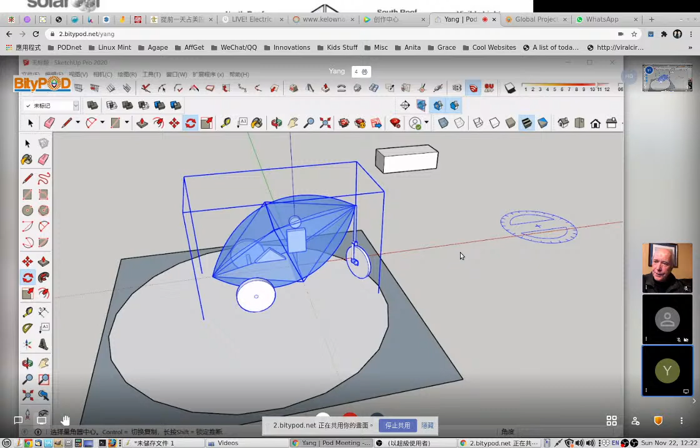Oh no, it shows that your microphone is muted. Oh, the setting - maybe I need to change it. I set it so that everyone joining is muted. Oh no, I disabled it. No, it's okay, I didn't. It shows your microphone is not muted, but we cannot hear you. Maybe let me kick this one out. Let me stop sharing my screen. Still nothing - I wonder whether it has something to do with this third person. Who is this guy? Is it you or someone else? I don't want to kick someone out. We have a fourth person now. Oh yeah, we got you now, that's good, we hear you. Now I think it might be that I have a Bluetooth keyboard, and I have to be careful about the Bluetooth connection - it takes two or three hits on the keyboard to lock in the connection. So I have to be sure my keyboard is activated, otherwise I try to allow but it's not accepting it. I'm not quite sure what's going on, maybe it's possible.

I wanted to ask you earlier, have you watched that video showing a group of kids riding on four-wheel wooden cars they made themselves? The one that Corin made, it's a long video. Yeah, I watched it - kind of crazy, very dangerous, but very fun, very experimental. Apparently they use braking to make it turn, because there's no steering wheel. Braking can be used for turning - looks like they use a similar mechanism. Yeah, this has been known for a long time, as you say, tractors, tanks, all kinds of mobility. And tanks are very mobile - they can move and go all terrain. So steering by braking is well known, it's not experimental.

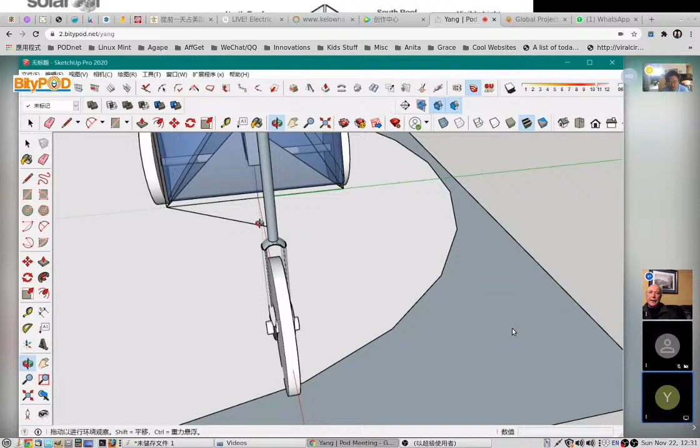What this triangulation is doing - because otherwise that's a long piece standing all by itself. So what if it hit a hard bump? It might break, it could be like a big arm torn away if it hits something hard. So this will help control the arm.

Let's look at the side view of that. Bring the whole thing. Now you see the vertical - the way that the tubing supporting the rear wheel is, I think it's completely vertical, the back wheel tubing, exactly vertical.

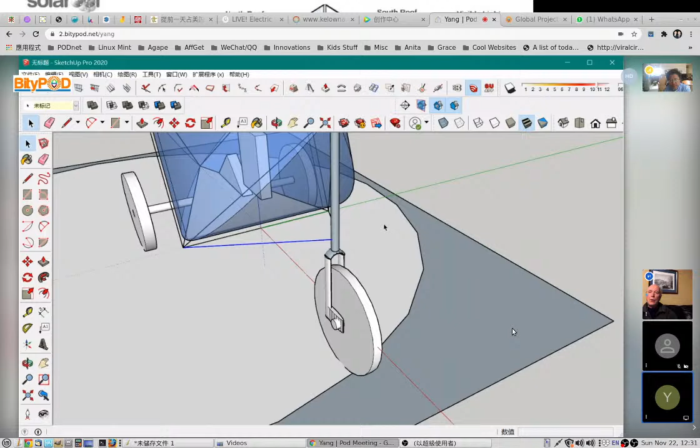What we could do is put it on a little bit of an angle, spread it out, push it to the rear, so the contact point of the wheel to the ground is further away. It's like rotating, pivoting the whole thing around a point up at the top. Turn it, push it out a little bit. What it's going to need is that we extend it as well, so it's still touching the ground.

Or what could happen is we lean the car backwards a little bit if we do that - so one or the other. If we want to keep the same angle, then we'll let that pipe be extended, stretch the pipe itself to compensate so we reach the ground. If we set the wheel on the ground, we just extend to make the connection, and won't worry about the connection up there and down below. Now those triangulated swing arms need to extend, and what happens is this is where it gets a little bit complicated.

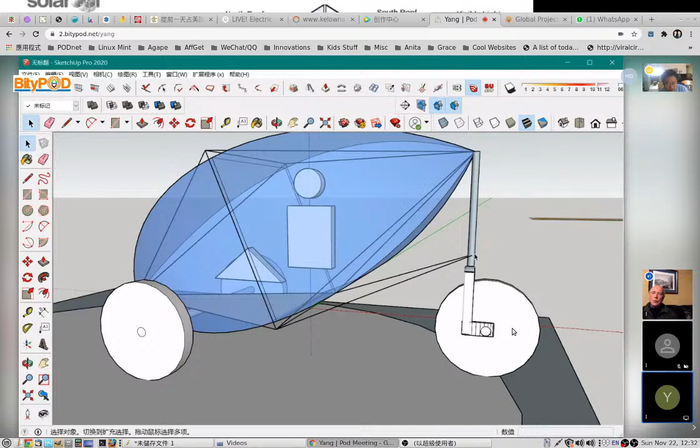Hi, who's there? Is that Anthony, the general contractor, the builder? Hi, Anthony. Today we're building a vehicle, Anthony. We cannot hear you, Anthony, so maybe your microphone is not working. I don't know, it's muted maybe.

Anyway, this is just like a bicycle, very much like a bicycle. So now you see the unsprung weight is the wheel that moves up and down when it hits a bump.

And the sprung weight tends to stay because it has a higher mass, a higher inertia. So the sprung weight, which is the vehicle and the passenger and the battery and everything else, tends to stay motionless because it has inertia - it wants to stay still.

So the wheel moves up and down, and the passenger is smooth, doesn't feel the bump. So the wheel is unsprung, moving, but the body and the passenger is still - that's the sprung, it's not moving.

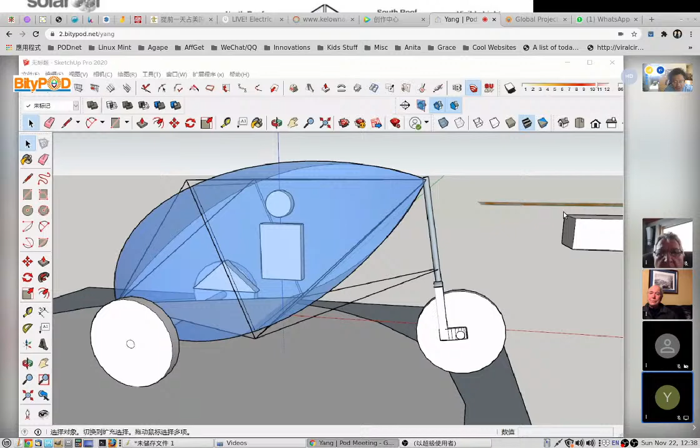So what we want is maximum sprung weight because it creates stability. If there was no spring, when you hit a bump, everything moves up and down - the passenger moves, the whole structure moves every time you hit a bump. But with the spring of the rear wheel, you're controlling that motion.

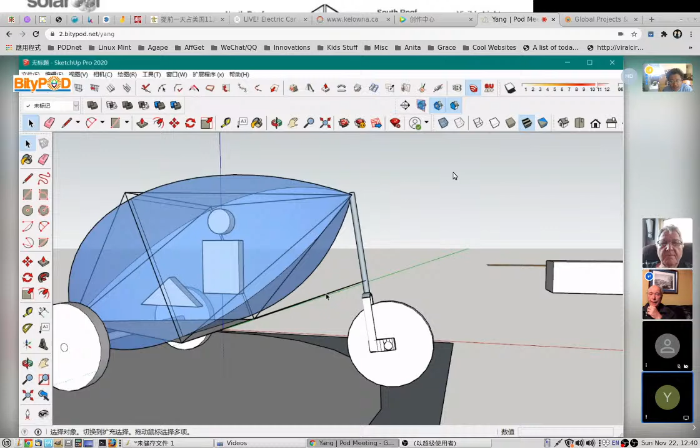Now you can also put another vector of spring in those arms if we want. What if when you hit a bump, they let the whole thing move a little bit backward? That's like a shock absorber, and then the other motion up and down is like a spring.

So I won't go into the details, but this is something we can work on - create a shock system that fits in with this system, and it helps smooth out the ride. You put the person on the spring.

Where's this? Oh, this person's in a spring. No, there's no spring inside - well, there could be, but just the seat, right? The seat could be sprung as well, but most important is the spring here for the wheel.

We fit that inside that pipe, the outside. And we could make the inner pipe and the outer pipe.

You know what I would do? Let's shrink the outside - let's shrink the pipe we have, and build a pipe around it.

Oh boy, your girl is very... Daddy, play with me.

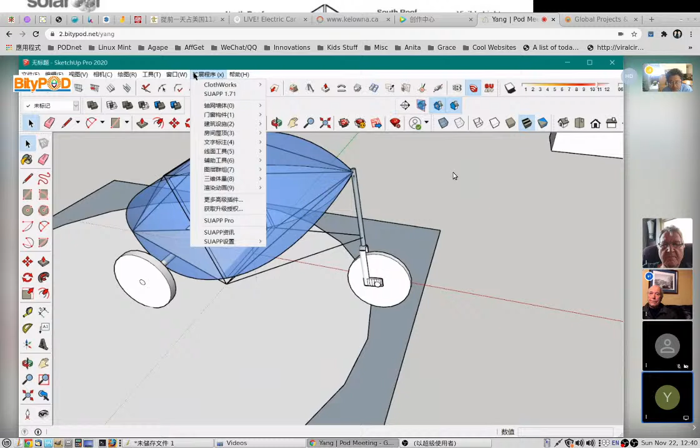Okay, so what we do is inside that big tube, we put a spring. It's inside the tube, right on top of the fork tube. So the tube that goes up from the fork, the slip fit tube, slips inside. On top of that we have a spring, right on top of that, we have a spring. And that resists the up and down movement, right? It resists the up and down. And the fork tube is going to have some kind of stopper.

It can't come out if it reaches the extent of its travel downward, right? Yeah, it can't fall out of the tube. That's right. It has to be locking there, but it can move up and down.

So we can just simply borrow the bicycle part. Well, the concepts are probably there, the things we need, the designs that we need. And with this kind of construction...

We have a comfortable ride. Very comfortable because it's not shaking you up. Also, that has the efficiency, right? Because then you have ground contact, and ground contact is very important. When you hit a bump, you go airborne, but with this system, the wheel keeps the ground connection. It always keeps the ground connection.

So what happens is, when you hit a bump, it goes upward and the passenger doesn't move. But when you go over a pothole, it goes downward and the passenger doesn't move. So basically, you keep the passenger's position more comfortable.

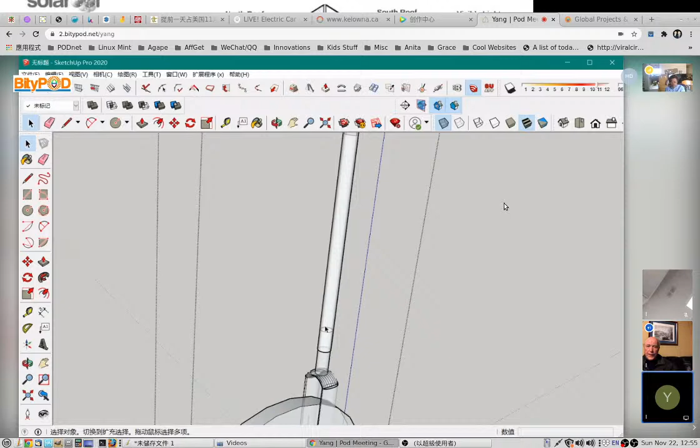Anyway, the person inside is not going to be protected from all of the bumping from the road condition, because the front wheels are not sprung. And so half of the weight is on those wheels, let's say. So that means the unsprung weight is really still pretty high, because all of that will move up and down every time you hit a bump.

So what we want to do is create a suspension for the front wheels. That's right, a suspension. I've been thinking a lot about that. And what we can do is let's go look at the front wheels. So we'll look from the front, from the nose.

Let's move the two wheels forward, just the wheels, keeping them on the ground. Move them only straight forward, not the axle though. Sorry, don't move the axle - undo that motion, leave it where it was, and only move the wheels forward, the same distance. Keep moving, move them more, keep going, pass.

You create an arm - there we go, yes, we create an arm. So now this is very much like we did at the back, when we did that fork. But these wheels don't turn, so we can create a fork around these wheels. Remember how we did the fork before? Let's do another fork around the wheels. In fact, we can use the fork we have.

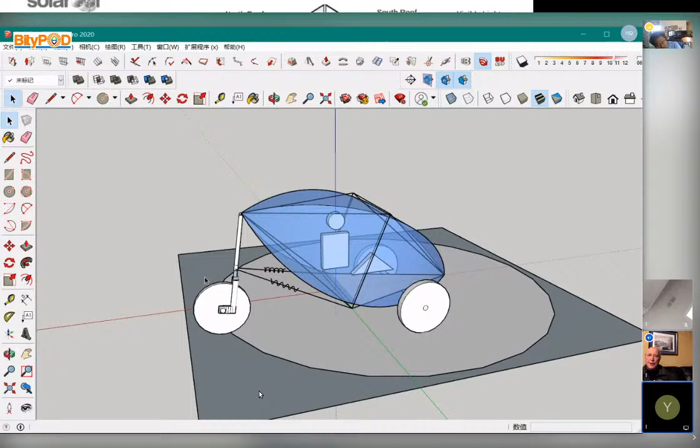Place the fork toward the front wheels. Yeah, that's true, that could be that, or it could be like that, that's possible, but let's do it like that. We'll have to modify it a little bit, but bring that over to the axle. Yeah, it could be that way, or it could be the other way - turn the other way, put it over by the axle, like that, where it should be. So the axle goes through, right in the center of the flange.

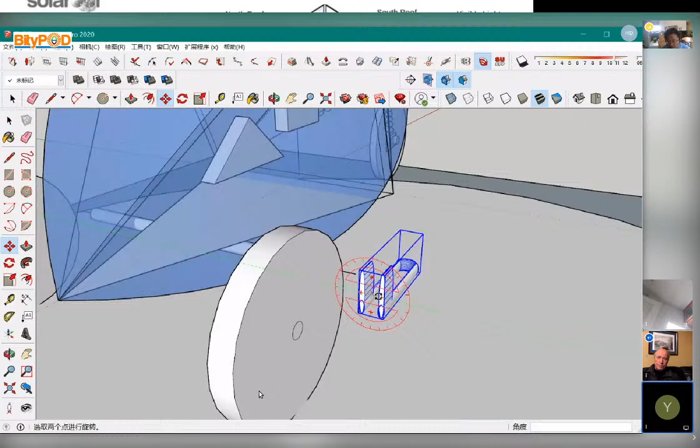That's good, that's good. Lower it so that the axle goes through - pull it down, align it now to go through the middle of the flange, right? Don't move anything else, just move the flange. Move the flange so the axle is going through in the middle of it, right? Push it down now, only moving the flange. Yeah, that's it, position it, that's about right.

Okay, so now what we need is we're going to need to connect the fork to the axle so that it can swing on the axle.

So what it could be is another tube that slips inside the axle. Maybe we'd redraw the fork - maybe the flange is not right because it doesn't really need to look like that. So let's keep the fork, but let's not use the flange we created for the rear wheel. Let's use a different kind of flange.

Yeah, so we'll keep the fork, we'll change the front flange, we'll just make it centered - make a flange that's right in the center, right in the center of the fork. So let's put a plate into the fork at the ends there, but the plate is centered. The plate can fit inside tubing like we did above with the plate. The plate is, you know, a kind of vertical line.

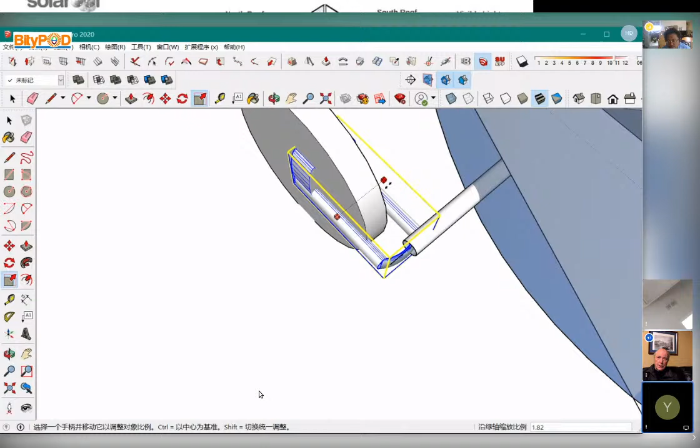Yeah, that's good, that's about that, and the plate is a bit bigger. And it can go through the - okay, yeah, shortening the tubing. Okay, and then we make the axle longer so that it reaches out to...